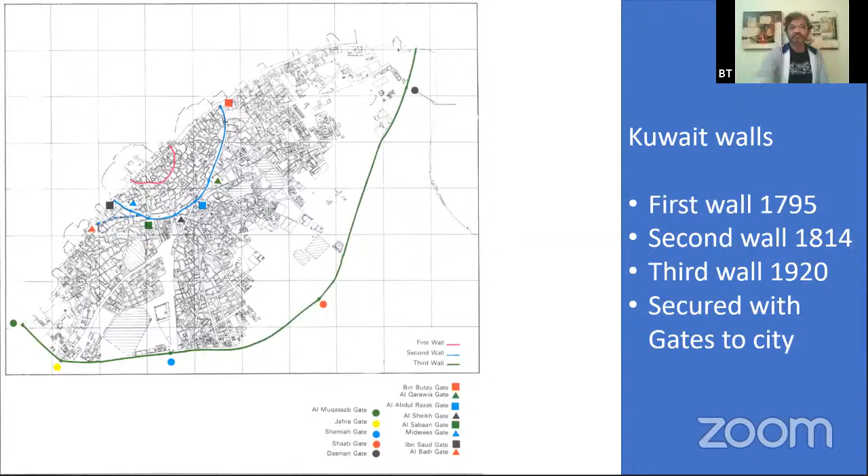In terms of actual resources, what settlement concentrated on is fishing as the main activity. So people go in the boats, fish and bring fish, and that becomes their daily activity. Other than that, Kuwaiti fishermen are also very famous for diving for pearls. So pearl selling and trading is another major activity that went along from Kuwait to Oman to India. So pearl diving and fishing are the major activities, other than the herding of sheep and camels.

Kuwaiti boats are very popular along the Gulf area. These are called dhows, and the bigger ships are called booms. They are very intricately constructed, from the small to the big. That kind of woodwork originates from India, from Kerala particularly, to Kuwait. And still some of these rich Kuwaitis keep modern boats in the same shape for their fishing time.

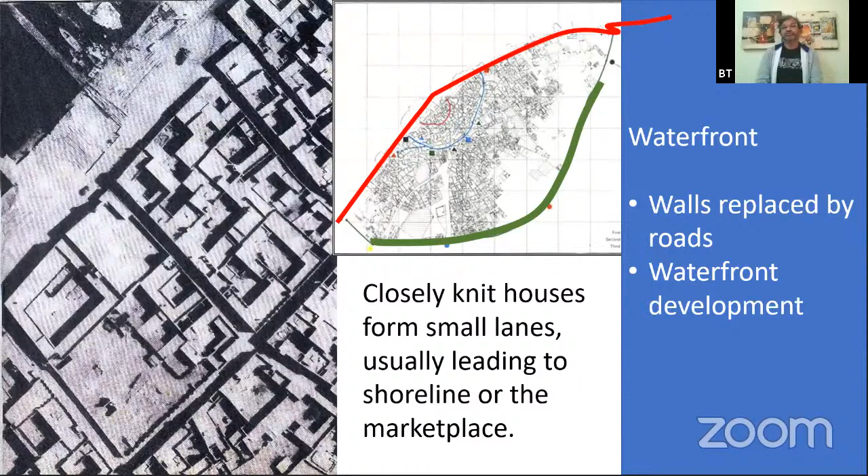The streets become very active outdoor spaces when somebody gets out of their house, because the houses themselves are becoming like fortresses, mainly because of the climate and the dust storms that come in Kuwait. So you have very high walls, and you usually enter your house by one or two doors. Except those two entryways, everything else is completely shielded from the climate.

So not only do these create very straightforward vista streets, effectively going either to the seashore or to the marketplace, but they also become wash-away areas. So whenever there is rain, it is all collected and sloped down to the seashore. People could actually come out and stay in the streets because they're mostly shaded all the time.

The temperatures, as you know, could vary between 20 degrees during normal winter times to 50-plus degrees during the summer. So the street becomes completely shaded because of the high walls and the narrowness of the street. The outside areas obviously become pleasant. After work, people gather around.

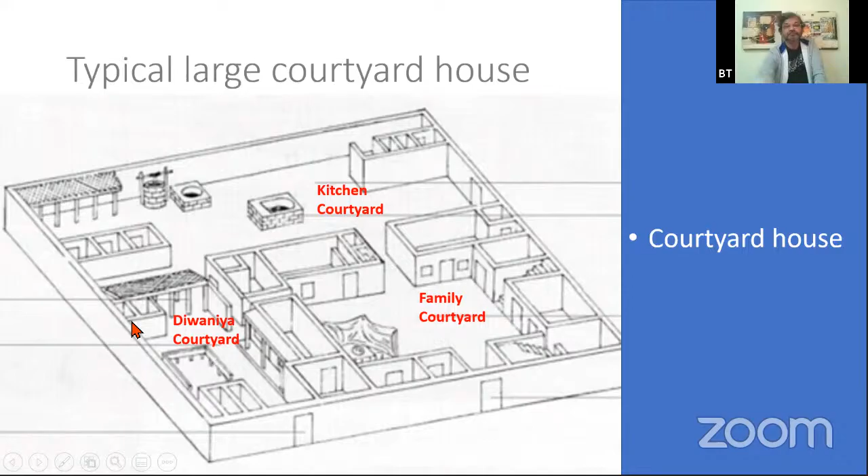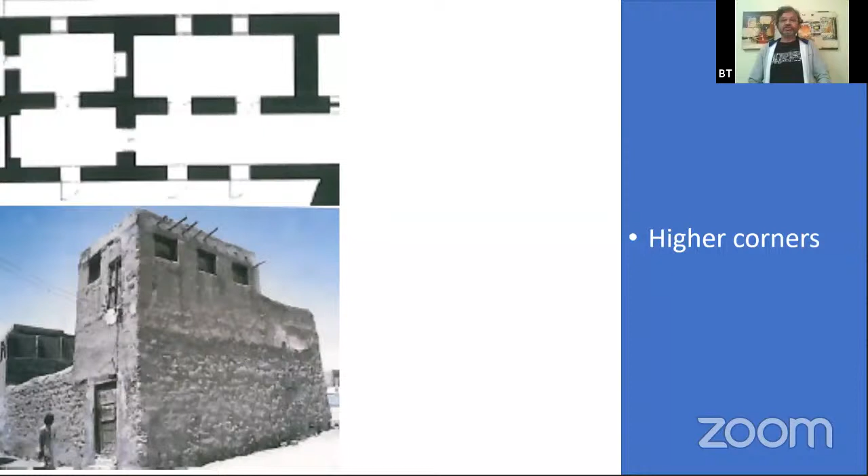In rich people's houses, you have arcades, sometimes decorated, usually opening into the courtyards. These corridors with arcades are called liwan, which is a very common feature. Particularly in Kuwait's sun arrangement, the orientation of the streets is north-south, so you have mostly shaded areas. The sun is on the top during midday and the north is usually protected. So northern parts are usually completely shaded, and western and eastern parts usually have a horizontal sun. So the courtyard is at least half shaded for the entire day.

The higher walls, again, are a major feature because of the storms that hit with sand. So whenever there are dust storms in the summer, a large amount of sand actually comes in and hits onto the walls and windows. So the windows have to be protected, the openings have to be protected. And so the walls, once you enter into a house, usually have complete closure.

And the rooftop rooms usually bring in cool air because of these features that actually bring the air into the building, which we'll see later.

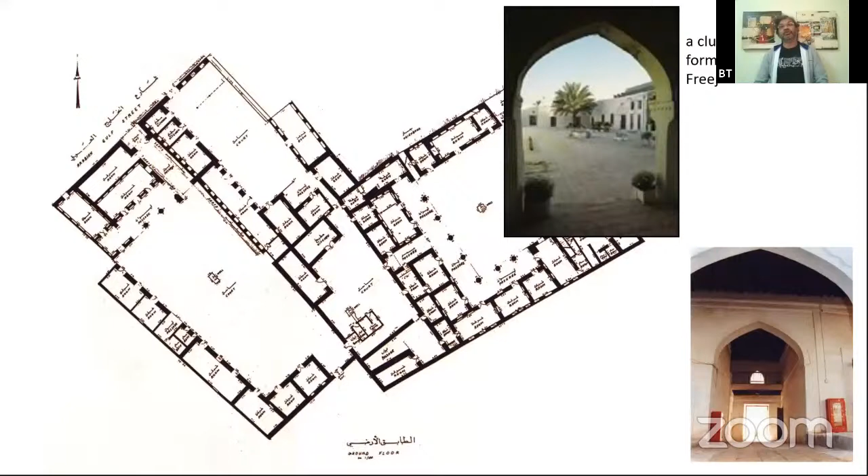You're sharing the slides? You're sharing slides? Yes. Are you not seeing the slides? No, we are not able to see the slides. We are able to see the slides. We need to just tap on the presentation. Yes. Yeah, you can see. Go ahead. Please go ahead.

Wood has to be imported, basically brought in from Iraq or India. So people who are rich could afford to have wooden columns, with very simple carved capitals, octagonal columns that are imported to support the liwan or the arcade, which opens into the courtyard. And the stairs that lead up to the roof are very small, narrow, and basically closed off during the dust storms, but generally provide a sleeping place on the top roof terrace.

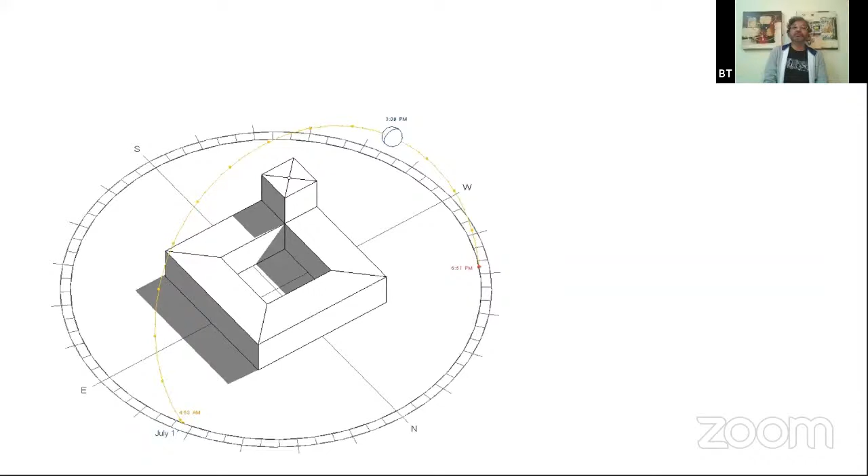A simple diagram that shows courtyard proportions of a Kuwaiti house at any given time. This is peak summer in July; you would still see half of the court covered in shade, and the next house will start after a similar size of the street. So the streets are usually shaded, as you can see on the left side. And when you add a smaller structure on the top, you actually provide better shading onto the roof. So the roof becomes cooler at that point, and that space becomes usable in the evenings.

So the proportions of the courtyard, the shading that's employed, and the orientation of the buildings were very much an in thing, because the streets that go along the north-south axis have usually already been taken care of. So you have to follow that grid. You have to follow those street lines, and people have been left spaces to build on. So that really set forth how they oriented the houses and the courtyards.

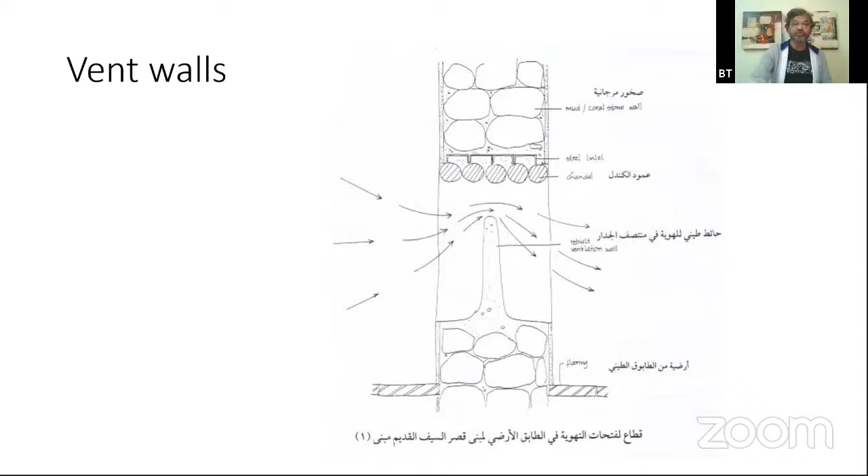And this is also seen using openings on the rooftop through the parapets, or through creating a complete wall that brings the air down into the rooms along the courtyard. So what you see here is openings that are on the roof parapet. You have an opening here, and below here you have openings. So the air actually strikes the wall and goes down and gets cooler, because it's traveling the entire length of the wall, and then you are getting the air at the bottom into the room.

And inside these houses, you would have put these water pots, so that the air, when it travels down, actually touches upon the pots and gets you into a comfortable condition. Some have developed them into different sizes and openings, some of them again with a wooden cover. So during the dust storms, they would simply cover them so the dust wouldn't enter. Or during the cleaning process, they would take those out and clean inside.

Some of these indigenous systems of air movement into the buildings create wonderful passive ventilation. You would hit, for example, a parapet here and bring down the air through the opening, which is the section shown here. Or these are called the badgirs. A tower is created about another level up onto the roof, where you can bring in air from any direction and then it gets down. Something like this, which is now demolished, this particular structure. So you would hit the wind with this and then bring it down through here into the room.

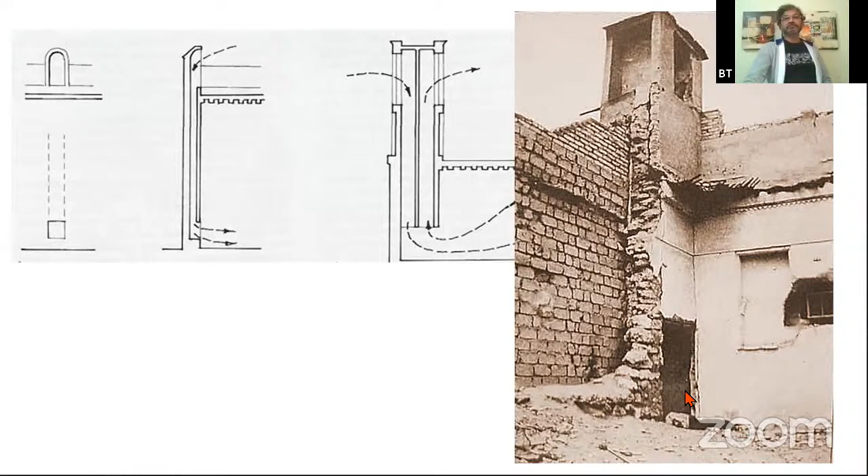The interiors are very simple, generally lime plastered, with niches that give storage spaces for the kitchen or the living area. So all these features are basically responding to what's available, while very ingeniously bringing the hot air inside but getting it cooler by transporting it through the very thick walls. So that's very, very different to the ideas that are generated in Rajasthan, for example, with similar climatic conditions.

From here, I would explain why it's so different in terms of its materials. So if you have any questions, I would pause. During this transformation from traditional architecture to the modern, have you seen any change or effect on the planning and in terms of the materials? In terms of the new architecture? Yes, this transformation that you have seen. Has it affected the planning and the materials?

Yeah, absolutely. Currently what's happening in Kuwait is, since the drastic economic uplift with the oil, you can actually buy things from outside and you don't need to depend on what's available in Kuwait anymore. So you have the availability of resources; that's not a criterion or a constraint anymore. Once you have that, the whole situation of planning your house has changed, except how you live in terms of privacy for the women, privacy for the family, and the semi-private zone for the Diwania. That's all the same, except that the materials are different.

If you look at the construction techniques and materials in Kuwait, mud is one of the important materials that binds together with the stone coming from the seafront. As you can see, this is the eroded part of the wall where, with the rains, people haven't maintained it. You can see the coral walls constructed in layers - there is no regularity, it's just putting stones upon stones with lumps of mud. It's a basic technique of constructing something vertical.

However, because the technology involved in shaping and making bricks wasn't available at that time, they depended on what was available in terms of clay and coral stone. So they created massive walls which could stand on their own, and only the rich could afford to bring in bricks from Iraq or Iran. They had craftsmen coming into Kuwait from Iraq with shaped bricks which were used in building. So some of the houses you would see are built with brick.

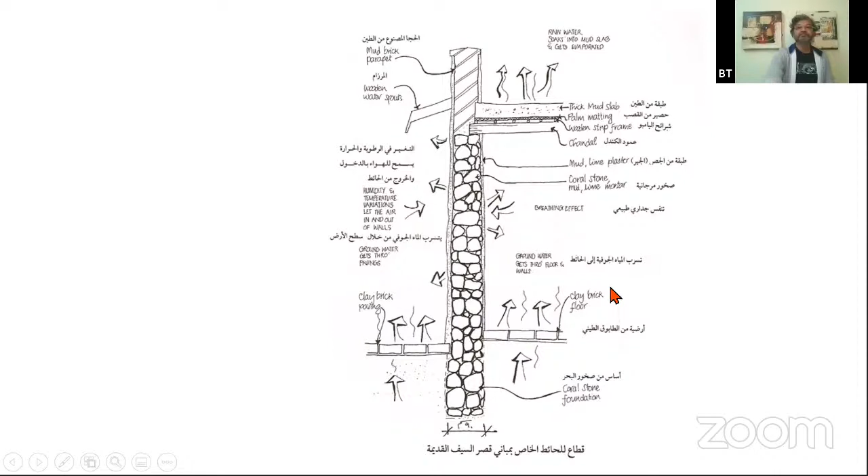So these are the layers of roof making: chandal beams, which are mangroves about 12 feet long, and split bamboo diagonally spaced between them. The beams are kept about 15 to 20 centimeters apart, and on top you have a palm matting - palm leaves woven together to form a mat. Over that, a layer of ramad, which is ash, used for waterproofing. On top, a thick layer of mud and a plaster. That's really a roof.

In terms of climate response, you have a very thick roof to protect you from heat gain. The roof is also plastered white - they plaster with lime, or they have mud and then plaster that with lime. So it's reflecting the heat, but also not transferring it, because you have a really thick mud slab that doesn't allow heat to come into the house.

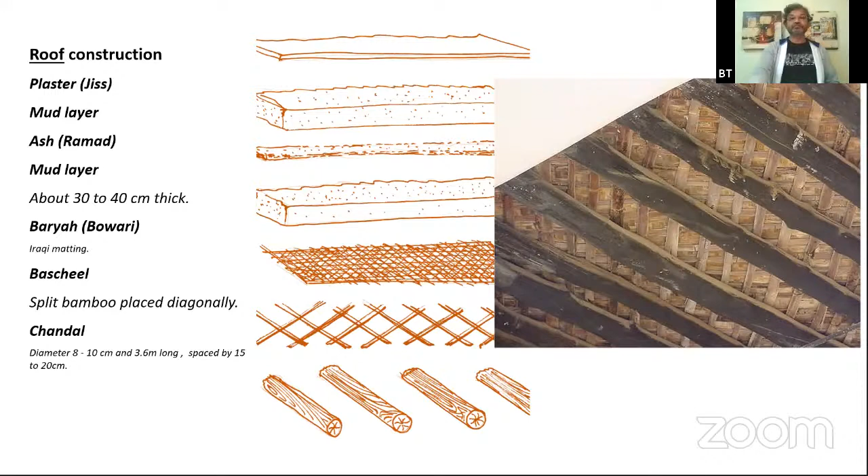Some examples of ceilings - inside you would see this sort of ceiling, and externally on the roof you would just see a mud slab. These have recently been refurbished as traditional diwaniyas. If they can get tar or bitumen, these are painted with it, though it's a material that's imported. So they paint it with black tar, the beams are put across, and after that the construction happens.

Some other examples of a very similar thing - it's very common to systematically make these as readily available components. You have mats being made, beams being made with the correct sizes and spacing, and on top the split bamboo and then the mud. So some of them are prefabricated, if you can say, and others are done on site.

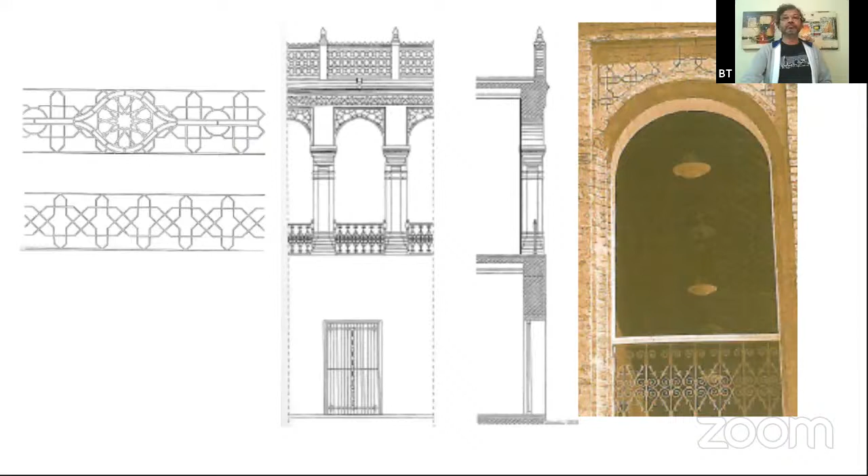Different types of doors - you can very much validate this with the craftsmanship of boat making. The nails are from the boats, the way they lacquer the wood is from the boats. So the craftsmanship of the boats is transformed into creating the doors. This is probably the only rich element you find in the whole house - the door is an expression of how rich the person is.

Other parts of the wood used are the drain pipes and sometimes columns. The courtyard is either paved with mud, or if they can afford it, thick brickwork. These materials are actually constraints for building, limiting the span. Mangroves are imported from India, from Mumbai in those days. They bring those beams, make palm leaves into palm matting and spliced beams, but the rest is basically clay and coral stone. That's what's left to construct with, so you end up with smaller span rooms and linear stretches of rooms around a courtyard, which don't transfer heat from the exterior or the roof.